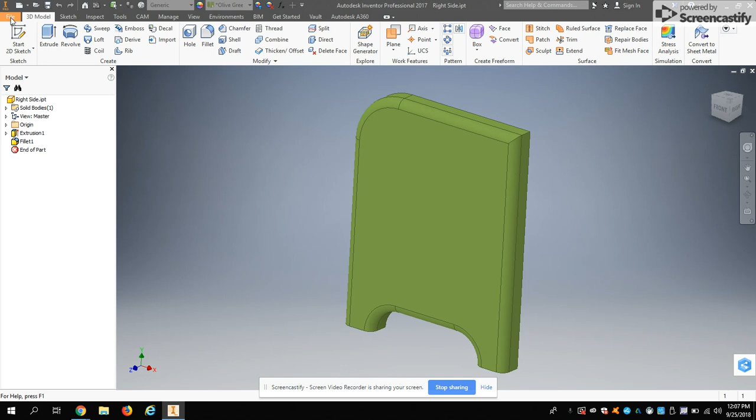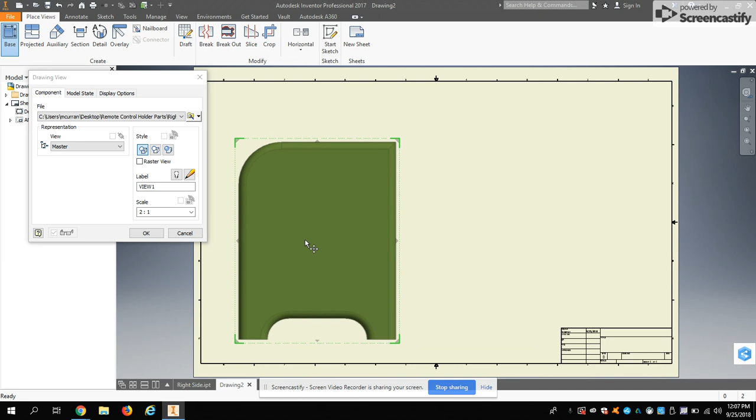I go to File, New, Drawing, and I don't need to make a drawing file of both sides, just one side. Click Base, and here is the parts you're going to be making. I like to scale this 2:1 so I can see it a little better. And I'm going to drop one on the lower left portion here. That's going to be my front view. Drop one on the dead right. That's my side view. Drop one right directly above.

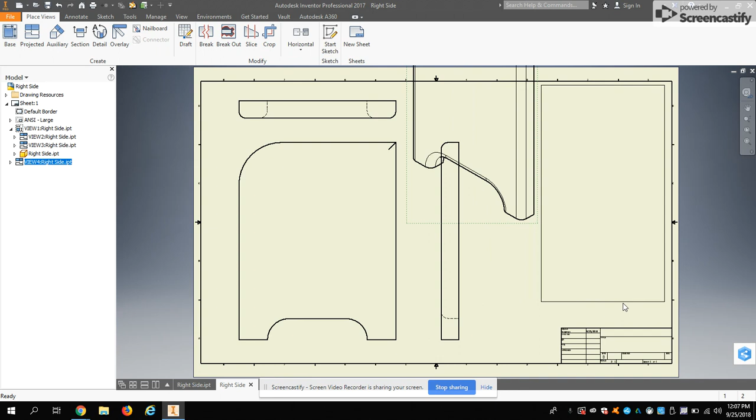That's my top view. Some people like to put a 3D view over here, and you can't drop it where you want it, but if you drop it up 45 degrees to this, you can move it later. So you can put that if you want. Click OK. And then first thing you want to do is just drag this so it's within our box. You never want to put anything outside of the box in a drawing file. So when we dimension, we do it on the outside of our parts. We never leave dimensions on the inside of a part.

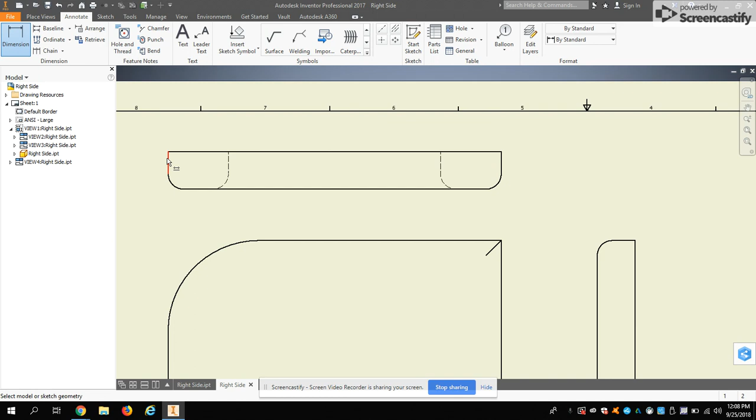We're going to start on the top here. And if you follow my dimensions, you're probably going to have the right ones. If you make up your own, you may not. I'm going to put an overall width here. And sometimes when you click on a line, it gives you a width, and sometimes it gives you like a section of a width. So that's not it. You can see where the 4 ends there. It's not working. So I escape, go back to the dimension. I'm going to go that side to that side. Now it gives me an overall width, which is what I want, 5.5.

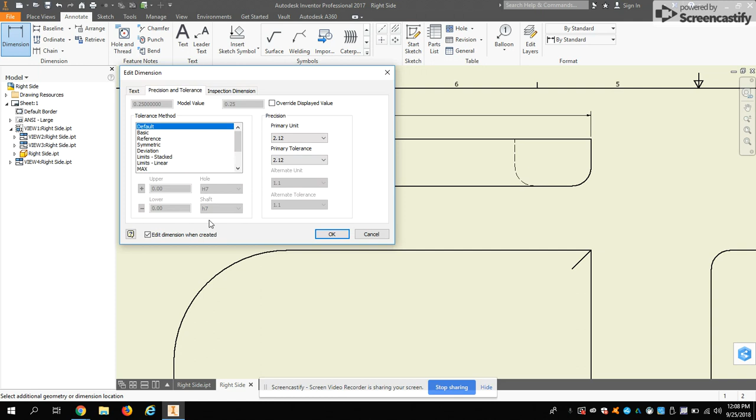Okay. Put a radius there, and that's for your fillet. Now, I don't know why this snaps to a green dot sometimes. If you click on the green dot, it doesn't leave a dimension. If you click outside of the green dot, it will leave a radius. I don't know why that is, but I do know that's how it is. So just don't click on the green dot. You could also put your radius over here. It's the same radius, up to you. That's about all I need on my top part here.

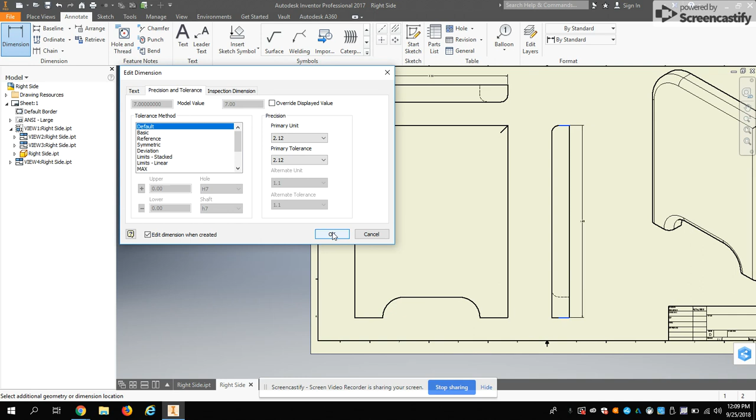I'm going to need a radius on my big curve here, and I'm going to go off the green dot. Big curve. Okay. I don't need a width again because I already have it here. I need a height somewhere. I think it makes more sense to put the height on my side view. So I'm going to go click on the top, click on the bottom, height right there. I will need a couple different things here. I'll need a radius on these circles, and I'll need a distance into the center.

I'll also need to put a foot distance here, and I'm going to put that on both even though they're the same. So I'm going to go 1, and I'm going to leave that real close to my piece. I'm going to put the same one here, click, click, 1. I want a distance from the side, click, to the center of my circle here, click, because that's where you have to measure when you make this thing for real if you want to get this in the right spot. And this is the same one over here. It's like an implied dimension, so I'm not going to put it over there as well.

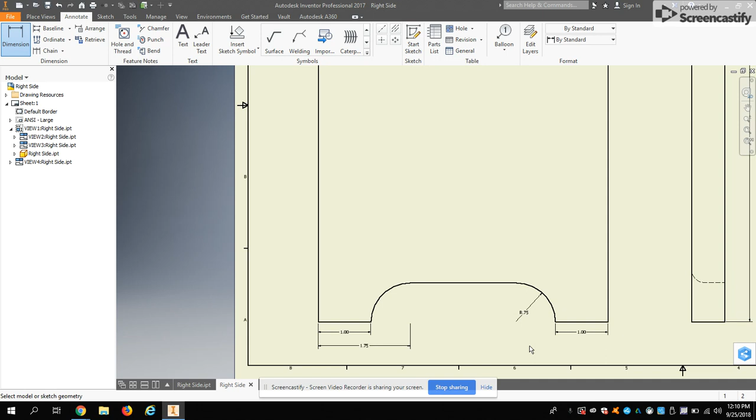I'm going to put a radius on only one of these because I don't need a radius on 2. Put it on this one because there's a little more room over on this side. This 1 inch here is probably redundant, but I'm just going to leave it on there just so we don't forget. So my side is okay. If you have a curvy top, put whatever dimensions in there you think you need to make your curvy top. I'm doing just the round over here, the easy one. And I also need a width somewhere. So I'm going to put a width right here. Top view would be a good spot for a width too.

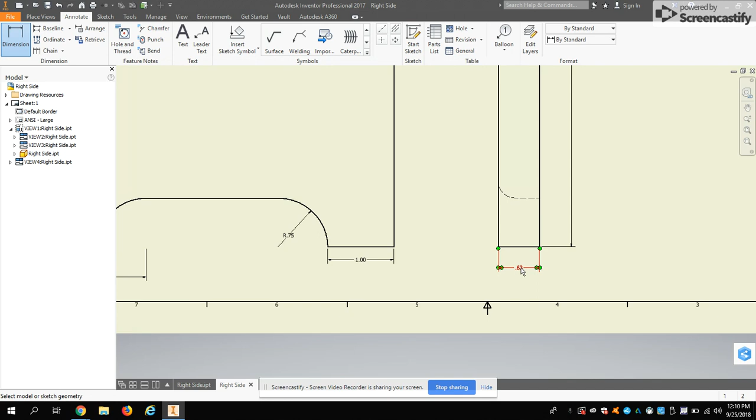0.625 is my width, and it rounds up. You can change it if you want by double clicking on this and just making that primary unit, not tenths, hundredths, you make it thousandths. If you don't remember to do that, that's okay. 0.6, it rounds up to 0.63, that's fine. So that's just about all my dimensions I need on here, I believe.

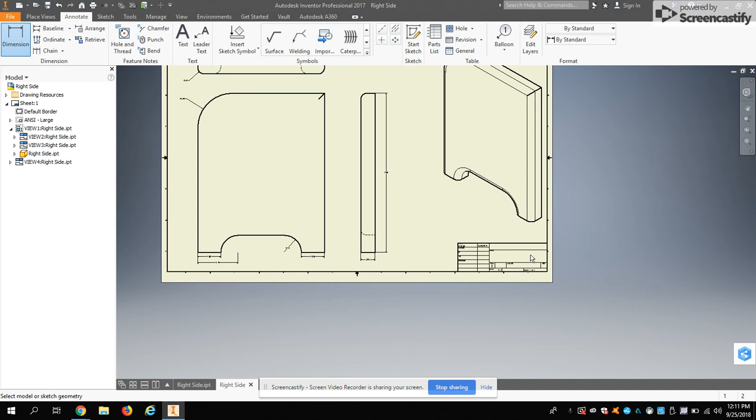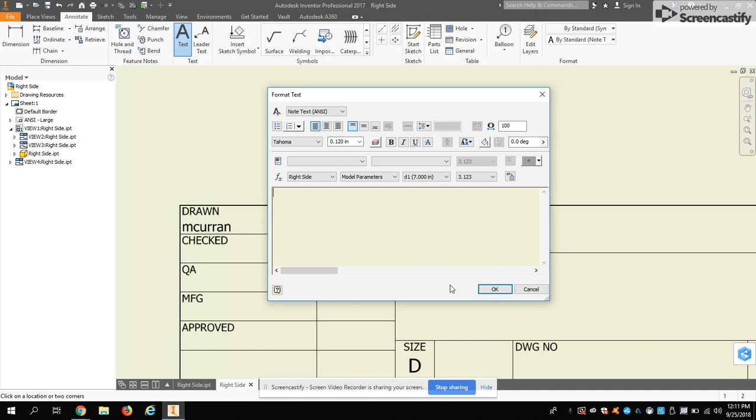Don't forget, right in here you put your name, you go to text. This is, capitalize it, and let's say first hour, put your name and hour on there. What happened there? Go back, okay. And title, this is my side view.

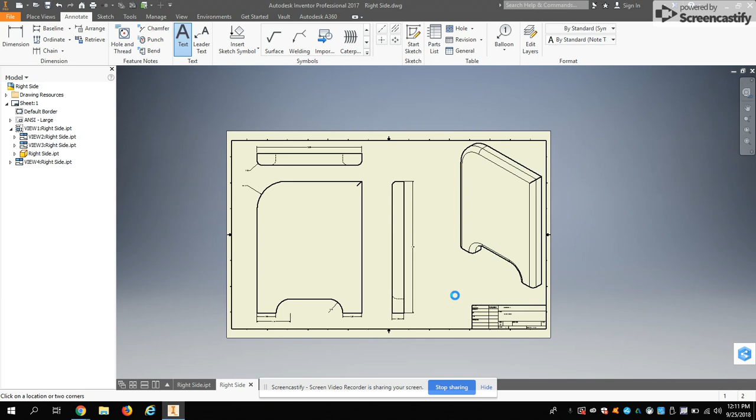And don't forget to save this, File, Save As, and find where all your other pieces are. It goes right to my remote control holder. Right side drawing, because I titled it that. That's probably why it said that. Save. And you can check it if you want. Make sure it's in there. Minimize this. And there's my folder right there. Right side drawing, great. So now I print this.

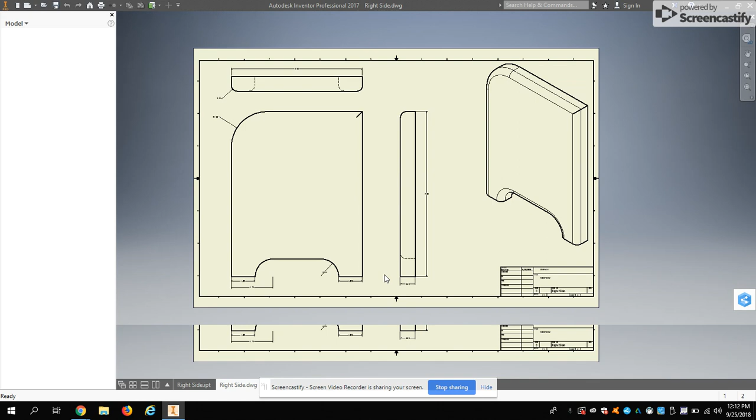Now when you print it, the trick is you go File, Print, and Preview. This is how it's going to come out right now. It's not good. So you close that and File, Print. You have to click this, Best Fit. If you don't click Best Fit, it's going to come out weird. So I preview this now. Yes, that looks good. So I go to Print, and you probably don't have to change this. It should say 176C, just double check. Okay, I'm going to fire one out on the printer because I need one of these. And I always save it, just make sure I'm done with this one.

Next video, I'll cover how to make the back. That one's super easy. It's basically the same thing, but I'll do it because some people want to see it.